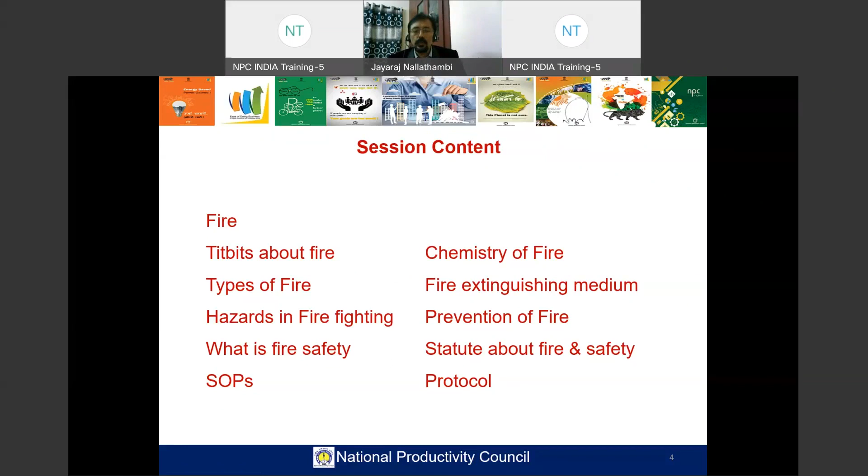activities involve some combustible actions. Combustion is the cause to produce fire. So fire is the visible effect of the process of combustion, a special type of chemical reaction.

What happened: until the year 1862, if the matchstick rubbed with any material, or stuck with another matchstick, it would catch fire. So it was very unsafe to handle. In a single box, we could have only one matchstick, or we had to provide a layer of coating over the matchstick to keep it in a single box. This was the history, because the composition of the matchstick was white phosphorus and potassium chlorate.

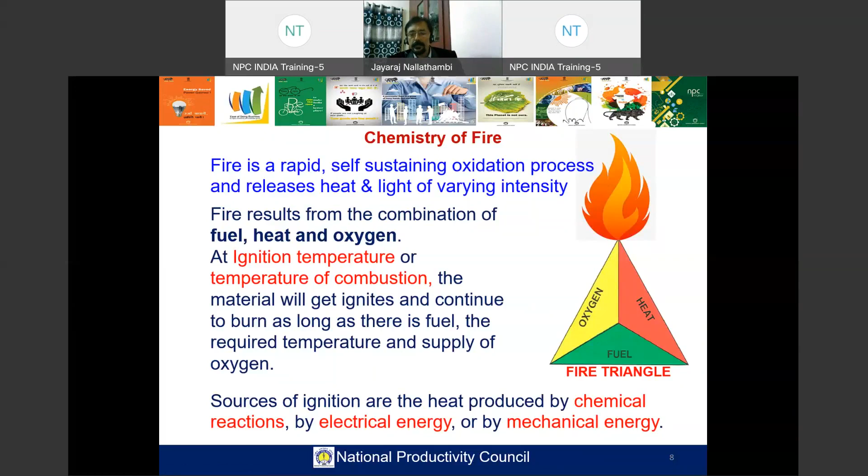Electrical energy by short circuit, or purposefully—deliberately creating heat energy by using electricity—is another source. Mechanical energy, mostly by friction, is another.

For a fire to be self-sustaining, the oxidation process itself should be self-sustaining. If the oxidation process does not continue, the fire will get put off.

The ignition that triggers the oxidation reaction between one tiny bundle of oxygen—say, one molecule of oxygen—and one tiny bundle of fuel must produce enough energy.

That is, the moment we ignite one tiny bundle of oxygen and fuel, giving it energy to start burning, it produces energy in turn.

That energy should be sufficient to ignite the next tiny bundle of fuel and oxygen, creating further burning. If this continues like this, it is considered a continuous chain reaction.

So in the fire triangle, in olden days we used to say there were only three legs—oxygen, fuel and heat. The later development added the chain reaction as a fourth element.

Unless the chain reaction sustains—unless the first particle of fuel burns to produce excess energy that induces fire in the next component of fuel—the fire will not continue. This is called a chain reaction.

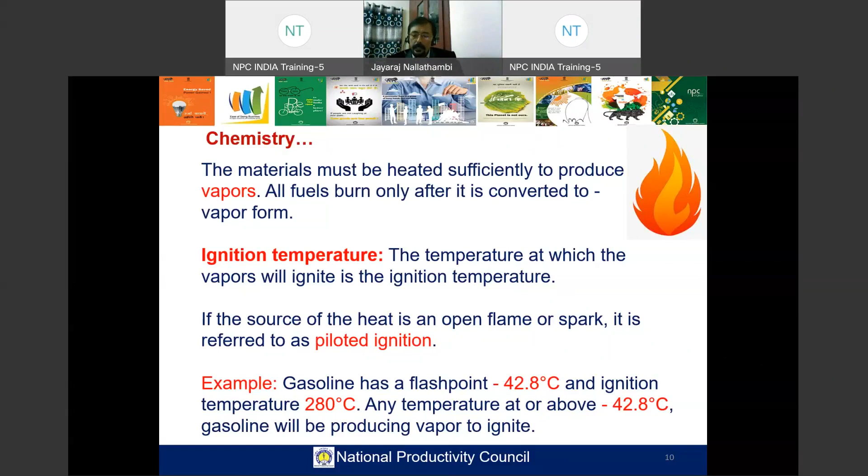What does that mean? From minus 42.8 degrees up to the ignition temperature, the gasoline is capable of producing sufficient vapor and catching fire if there is some source of piloted ignition given to it.

In the chemistry, normally carbon combines with oxygen in an oxidation reaction to give carbon dioxide. During this process, it releases a lot of heat energy.

Suppose oxygen is supplied in a limited quantity—then carbon is converted into carbon monoxide, CO, which can consume one more element of oxygen, meaning carbon monoxide itself can be used as a fuel. Carbon dioxide, however, is completely burnt and cannot be used further as fuel.

In fact, carbon dioxide is an extinguishing medium for fire. Similarly, hydrogen burns by combining with oxygen, liberating a lot of heat energy to form water. This is the main chemical reaction taking place during any kind of fire.

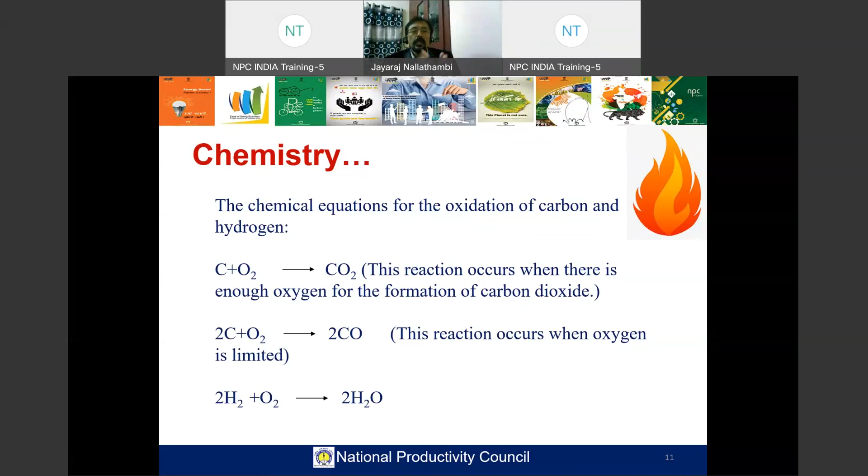What is heat? Heat is defined as the exchange of energy between system and surrounding. From one system, heat is transferred to the surrounding, and the direction of transfer of heat is from higher temperature to lower temperature. That will be the direction.

Flash point is the lowest temperature at which its vapors ignite. If no ignition source is given at flash point, it will not catch fire automatically. But suppose we give an ignition source, a spark or a flame, it will catch fire.

Fire point is the lowest temperature at which the vapors keep burning even after you remove the ignition source. It will continue to burn. That means it is able to generate sufficient energy to induce the ignition of the next element, every element in the sequential or chain reaction.

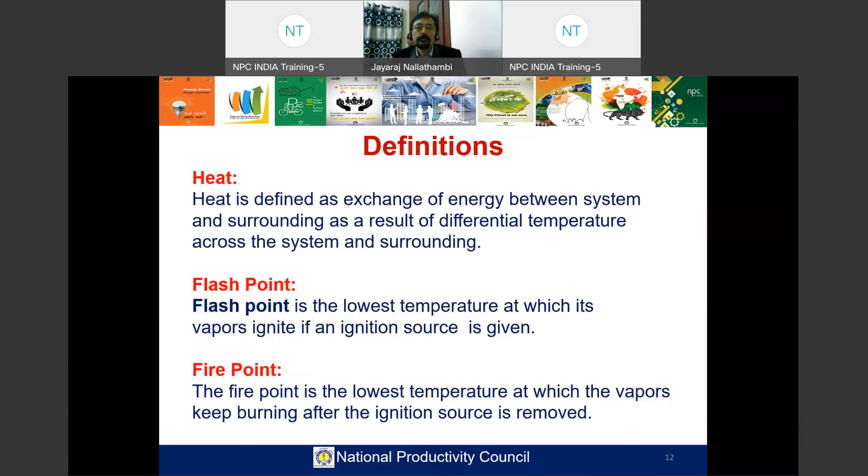What is pyrophoric iron? Industrial employees might be aware of this. Pyrophoric means any metal particle, if it is finely divided or crushed or sliced in a fine manner, and you allow it to oxidize, when oxidizing takes place, it becomes pyrophoric. Pyro means heat or fire. So when it comes in contact with atmospheric air, automatically it catches fire. That is, its auto ignition temperature is our atmospheric temperature.

For example, iron gets rusted in a sulfide environment, forming iron sulfide, and if it is finely divided, this iron sulfide forms over the iron structure. When this comes in contact with air, it catches fire automatically. That is pyrophoric iron. Other examples are plutonium and uranium, which also have the same property.

Combustion, what is combustion? Combustion is an exothermic reaction. Whichever reaction liberates heat is an exothermic reaction. It is self-sustaining, involving solid, liquid and gaseous fuel. Usually this is associated with the oxidation of fuel by atmospheric oxygen with the emission of heat, light, or both.

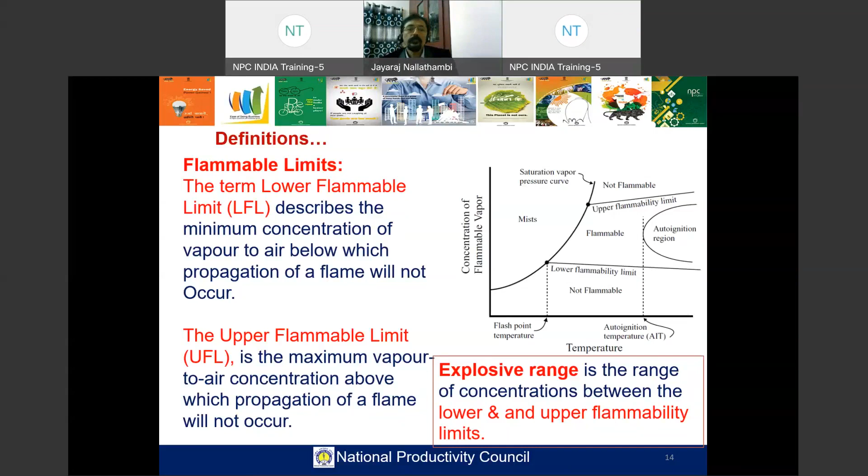Major causes of fire in industries. In most industries, we use fire for the purpose of energy, to initiate a reaction, to melt some metal, or to do some heat process for metal. For many things we use heat energy. So that's why we have to use it very safely.

Combustible material storage area with insufficient protection. Suppose we store a lot of combustible oil, gas, or explosive mixtures with insufficient protection, not properly covered, or kept very close to a hot surface. If this happens, it will be a cause of fire.

Handling open flames very near combustible material, like a candle or any other open flame. Flammable liquid and aerosols, meaning a fine mist of flammable liquid. If we spray some body spray or sanitizer, which we use very frequently nowadays, it is also a flammable component. If you press it, it comes out as aerosol, in fine particles, and if it comes in contact with fire, it will definitely catch fire.

Flammable liquids and aerosols, flammable solvents stored without protection. Chimneys, meaning the exhaust pipe of furnaces, if not cleaned properly, a lot of soot will accumulate inside and catch fire at some point.

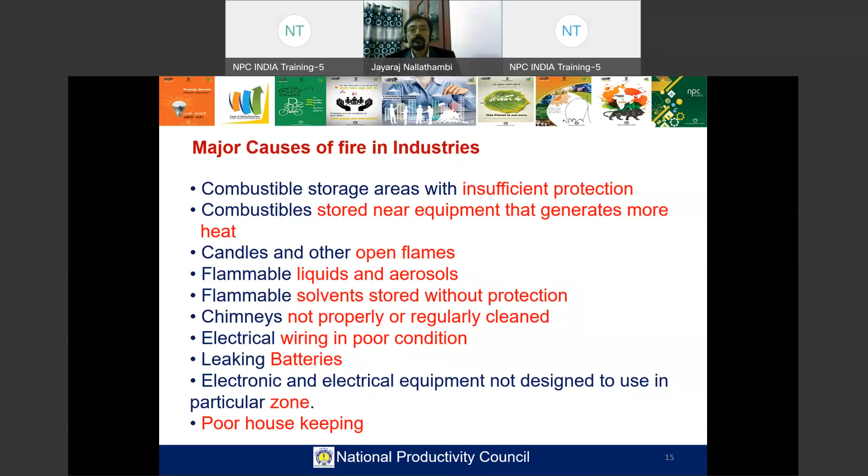Now we'll see the type of fire. Our Constitution of India provides detailed provisions for the rights of citizens to safety and health at the workplace, and provides measures to ensure safe and healthy working conditions for every workman and woman in the nation. As per BIS standard,

IS 2190/2010 classifies fire as follows. You would have seen in fire extinguishers, a lot of alphabets displayed like A, B, C. So we will see the types of fire.

So A fire, it's a shortcut method I'm telling you: after burning, whatever component is in the fire produces some ash. A for ash, just keep that in mind. Like wood, paper, waste material, all these are A type fire, which can produce ash after burning, reduced to ashes. Cooling effort is more than sufficient to put out the fire, so mostly we use water.

Class B fires involve flammable liquids or liquefiable solids, where a blanketing effect is essential. This B fire is like a boiling liquid fire.

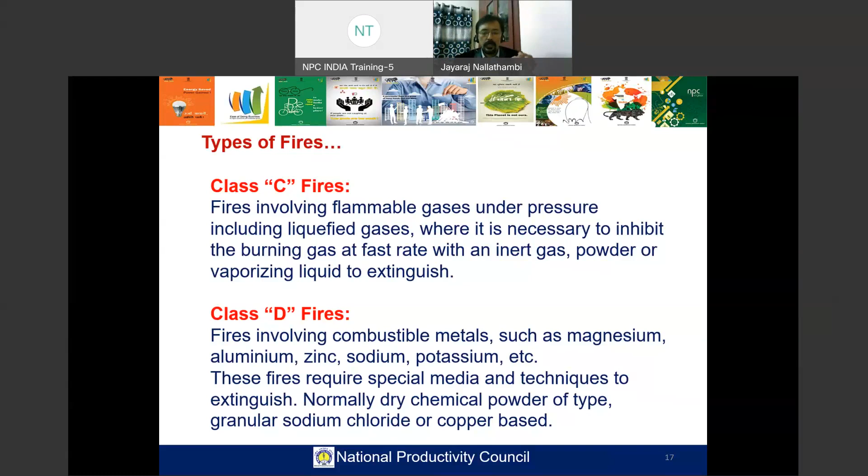Next one is class E. This E is not clearly classified anywhere. We call it electrical fire, but when you consider an electrical fire, the moment you switch off or trip the electrical supply to the system, it automatically changes from electrical fire to the fire of the material involved. Suppose it's wood, then type A fire. If it's gas, then type C fire. So as long as you don't disconnect or de-energize the system from electricity, it is considered an electrical fire. Normally people don't use this class E as electrical fire, it's a general term only.

For electrical fire, we use carbon dioxide, an inert gas, as the extinguishing medium.

The latest addition is class F fire. There's cooking fat and oil. It happens in kitchens, not only domestic, but in bigger level kitchens in industries, hotel industries and so on. Deep frying pans and all these handle very hot oils. It can catch fire if the oil reaches its auto ignition temperature, and at that moment it will catch fire.

The picture on the right side was deliberately taken in a laboratory, where oil was kept in a pan and heated to allow it to reach its auto ignition temperature. The moment the auto ignition temperature is reached, the oil catches fire. After the oil catches fire, deliberately from a safer distance, water was poured in. The moment water was poured in, it splashed over the oil to the outer atmosphere and the flame expands like this, so the entire area is in flame. It's a laboratory test method photo for this.

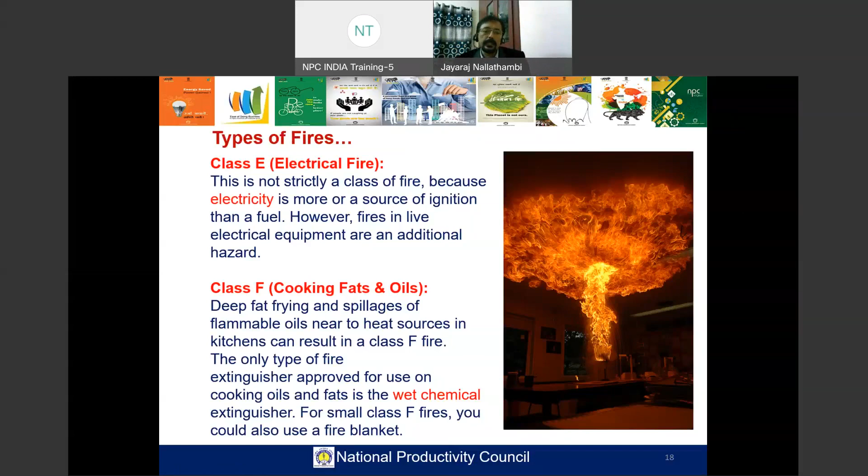So this table describes the type of fires and what kind of extinguishing medium we use. You can refer to this - whatever we discussed so far is displayed here.

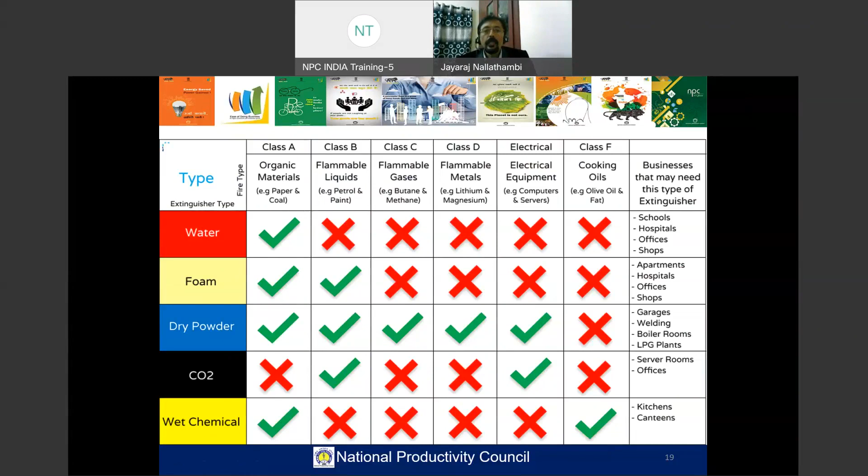Now we'll go to fire extinguishers. A fire extinguisher is used to extinguish fire as long as the fire is under control. If it goes beyond control, the fire extinguisher is not going to help. We can say it's a first aid firefighting equipment - as long as the fire is under control, you can use the fire extinguisher.

Very importantly, the persons available in the premises where there is fire should have been trained on how to use a fire extinguisher. That is very important in the event of fire. If they don't get proper training, they will simply waste the fire extinguisher and it will not be properly used. If employees have not been trained properly, firefighting may get delayed, extinguisher material may go unused or wasted, leading to consuming more extinguishers.

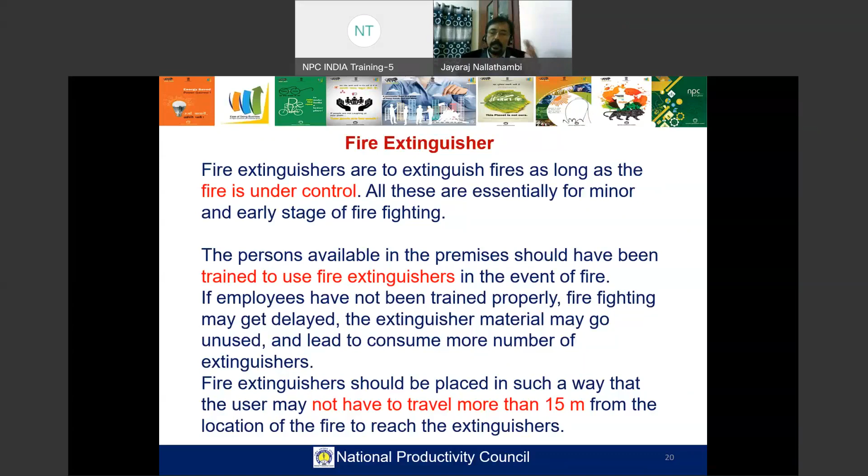Fire extinguishers should be placed in such a way that the moment you see the fire, from the spot of the fire you should not need to walk or run over 15 meters. That means every 15 meters, or taking the middle point with 15 meters on both sides, fire extinguishers should be placed at such a gap. The person should not run here and there to find a fire extinguisher more than 15 meters away - that is a safer practice for industry as well as for big buildings.

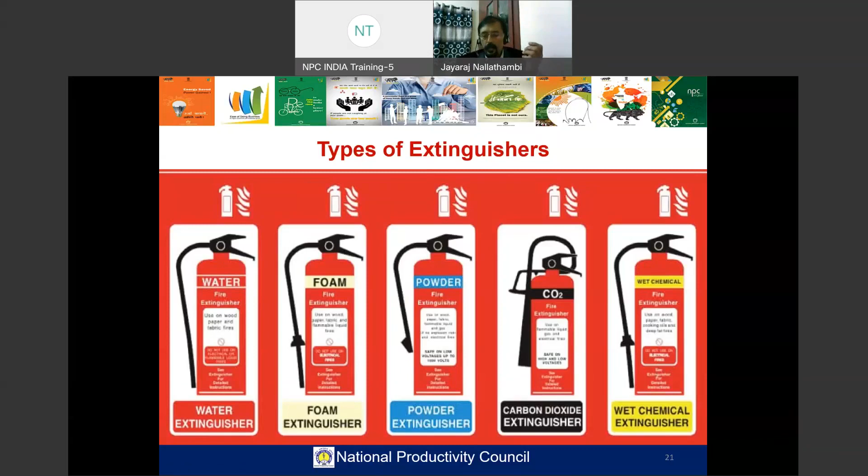These are the types of extinguishers - we will see detail about them in later slides. One is water, where compressed air is filled along with water, kept under air pressure. Foam - we will see what that is. Powder - there are a lot of powders, dry chemical powder as a general name. CO2 is carbon dioxide, and wet chemical is for type F fire, that is kitchen fire. So these are the different types of extinguishers - please note the points about them.

Availability at the designated place. It should be checked whether the extinguisher is available at the place marked for it. Suppose somebody has taken it and kept it somewhere else, then when the real need comes, we have to search for it and waste time.

No obstruction to access or visibility. There should not be any obstruction to reach the fire extinguisher. Operating instructions should be legible and facing outward.

Safety seals should be intact. If it is removed, then the pressure may not be there inside, and it will not help in the emergency.

Whether it is full should be checked. Fullness is determined by weighing or lifting. Just by carrying it, you can feel the weight of the extinguisher.

Examine for physical damage like corrosion, leaks, or clogging, or damage in the hose, something that you can see as physical damage. If a pressure gauge is available, whether it is showing the required pressure range should also be checked.

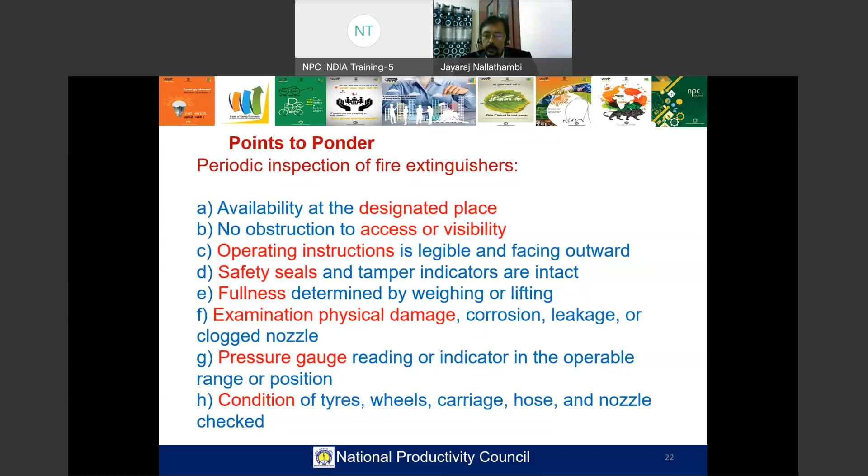Condition of tires, wheels, carriage, hose, and nozzle should be checked. Where wheels and tires are involved, very big size extinguishers are kept on a trolley, like a truck kind of thing, so the wheel should be proper. Then only we can push it to the required place at the time of emergency.

This is the high volume long range monitor, abbreviation HVLR. Using this HVLR, we can throw water for a long distance of more than 85 meters, and the capacity is 2000 gallons to 4000 gallons per minute. Please note, 2000 to 4000 gallons. We all know 1 gallon is approximately equal to 3.75 liters. So you just multiply and see the capacity or quantity of water we can throw at the fire accident place using this high volume long range monitor, or HVLR.

This is both manually operated as well as motorized, using a remote also. We need not go to the spot. Standing safely away from the fire scene, we can operate it. That is, we can turn the direction up, down, and swivel sideways, and adjust the flow pattern also, like spray or jet or nozzle.

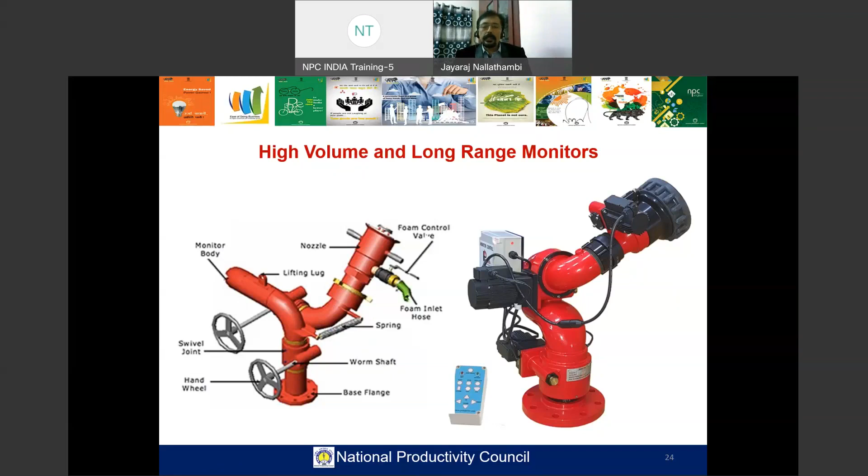This is the left one, the manual one, we can operate this for the same capacity. How it is effective and useful at the time of very high intense fire, you can see in the later slide. Before that, these are certain photographs of fire water sprinklers.

The purpose of the fire water sprinkler is for the most dangerous or vaporized, evaporative, high volatile material stored vessels. Suppose due to any reason gas leaks or a fire occurs nearby, due to that heat intensity, the stored vessel should not get heated up. If such a situation arises, automatically these sprinklers will start to spray water on the entire outer surface area of the vessel, so that the vessel is kept under cooled condition.

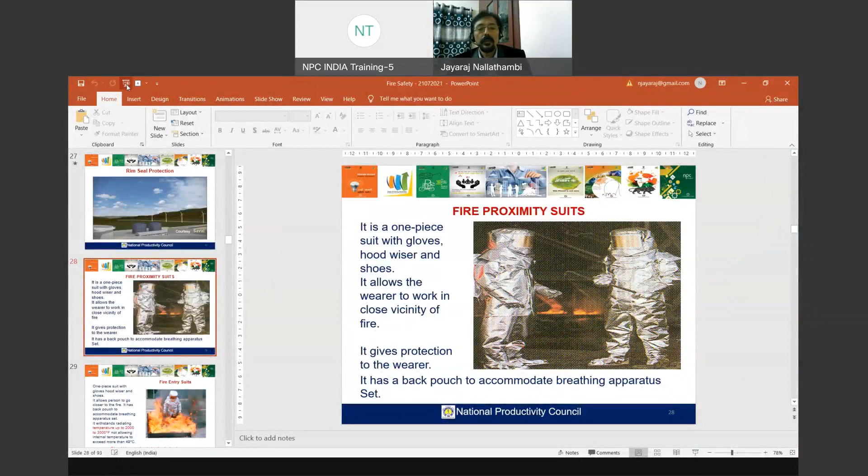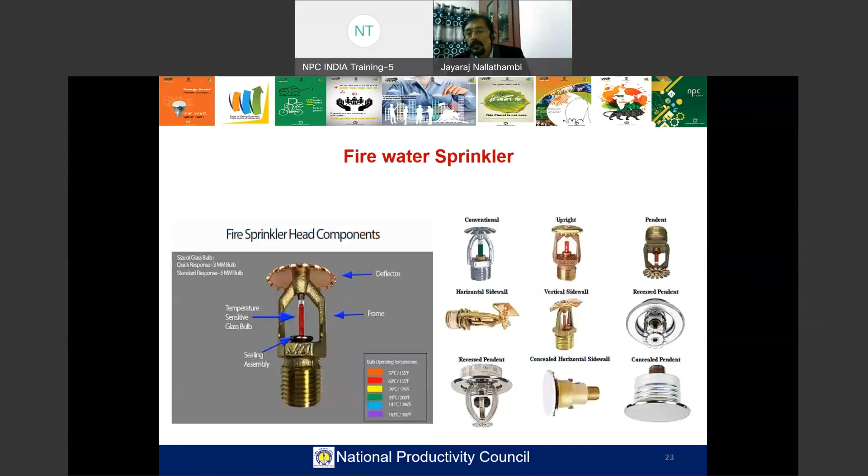In that slide, we saw that when vapor gets accumulated, possibilities are there that if lightning strikes or any inadvertent accident takes place, this system will automatically sense it. As discussed with the sprinkler, one bulb gets broken the moment the temperature of the environment rises, and it initiates water spray. Similarly here, a temperature sensitive bulb gets broken, and it sprays the pressurized vessel which contains halon gases to put out the fire.

It's a latest development. The other thing is fire proximity suits. To fight a fire, we can reach very close proximity to it, not into the fire. Please understand, it is a proximity suit only, not a fire suit. Fire suit is different and also available. This suit is a one-piece suit with gloves, hood, visor, and shoes. It allows the wearer to work in close vicinity of fire and gives protection to the wearer.

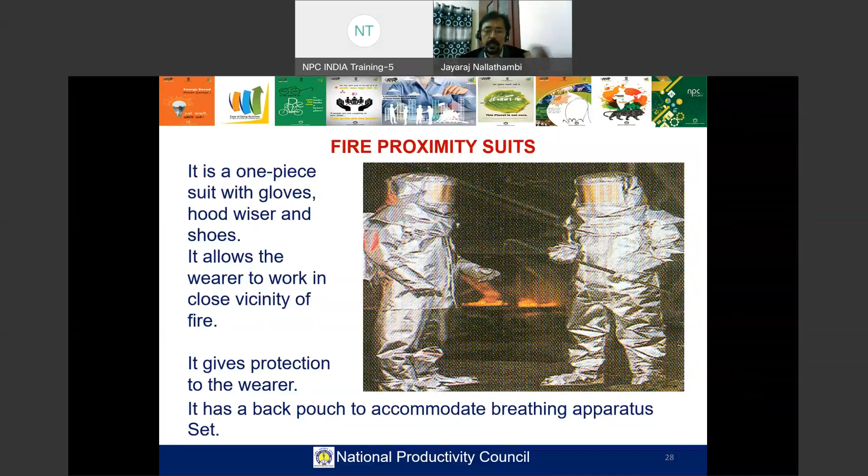It has a back pouch to accommodate breathing apparatus. You all must be knowing from industry that breathing apparatus contains pressurized air which supplies controlled breathing. This is a fire entry suit.

The difference between fire proximity and fire entry suit is that the fire entry suit is made up of mostly asbestos material which can withstand temperatures up to 2000 to 3000 degrees Fahrenheit, not centigrade. The facilities available are both the same; only the withstanding temperature capacity is very high. It should be used only by trained persons, because once you fit the suit, it's not easy to walk, move, view, or communicate with people behind you. It is not easy unless you are trained properly. It will look like a man going to space.

We'll see the firefighting medium. The most common, cheapest, and abundantly available firefighting medium, what is that? It is nothing but water. Why is water so easy to put out fire?

For putting out fire, what we are going to do is remove one of the handles of the fire triangle: heat, air, or fuel. Here you remove the heat, that means you are going to cool, you are reducing the temperature. That means you are going to use some material which is capable of removing the heat.

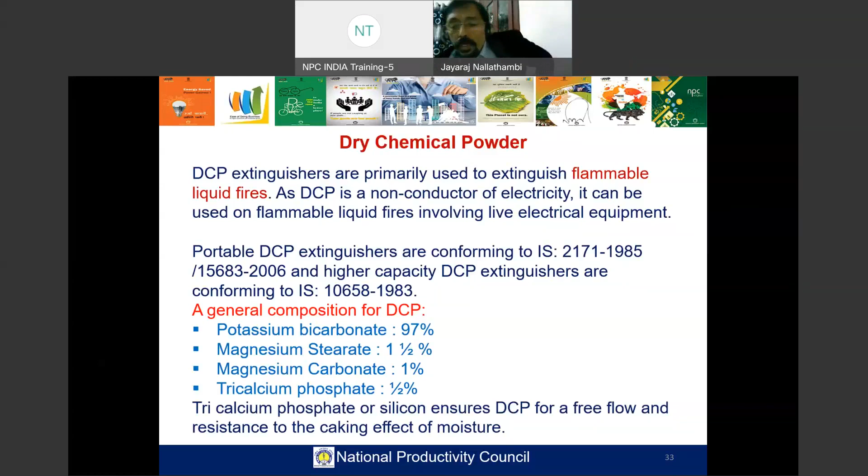1985/15683-2006, and higher capacity DCP extinguishers as per standard number 10658-1983. What is the DCP composition? DCP means dry chemical powder: potassium bicarbonate, magnesium stearate, magnesium carbonate, tricalcium phosphate. Tricalcium phosphate or silicon ensures this is very important. So all this powder we put together in a vessel cylinder, and if we keep it for a long time and it becomes a bulk or a lump, what will happen at the time of requirement? It will not flow out. To ensure the flow, silicon component is mixed with it so that it will not form a cake.

Carbon dioxide is another extinguishing medium, that is CO2. It's an inert, non-corrosive, non-conductor of electricity, used for fire involving energized electrical equipment.

Very important thing: when you use the carbon dioxide extinguisher, as it comes out of the nozzle it creates a chilling effect because the carbon dioxide utilizes the heat available in the environment to get fully vaporized. So the nozzle or hose, the horn of the extinguisher, becomes very chill. A phenomenon called frostbite can occur, where our skin attaches to the cold surface.

Another point is because of this chilling effect, the outer surface will become wet. Once it becomes wet, because of dirt or impurities on the outer surface of the horn, it may start to conduct electricity. So even though carbon dioxide itself is a non-conductor, this wetness created by the chilling effect may conduct electricity. Care should be taken before using the CO2 extinguisher.

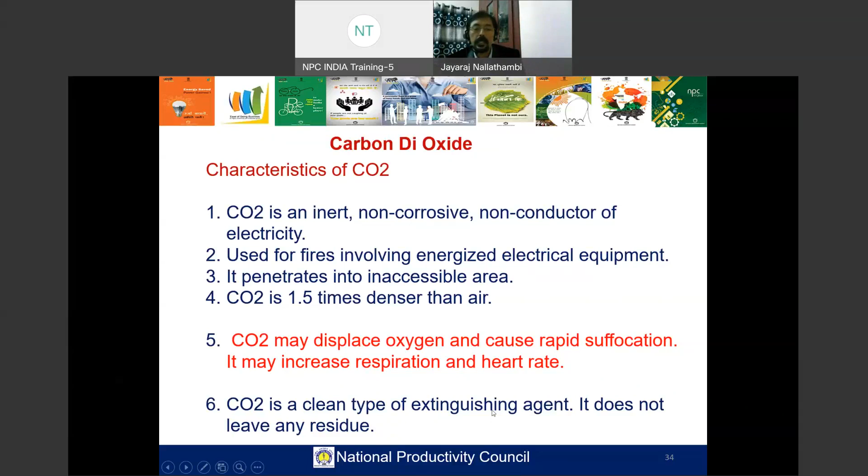Mostly in industry, steam will be available. If you use a lot of steam, you can give a blanketing effect for air, so it is considered as removal of oxygen from the fire source. That is how it is used.

Sand can be used to prevent the spreading of burning liquids. Sand should not be used for extinguishing fires in rotating machines, that is very important.

Fire blanket: suppose a person near a fire accident has his dress material catch fire, this fire blanket, filled with a kind of jelly, can be covered over him to give a cooling effect, and he should roll on the floor to put out the fire and get saved.

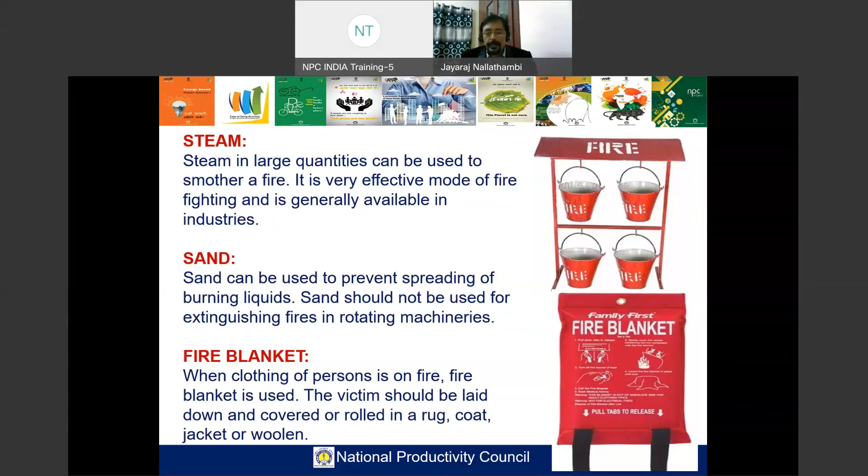This wet chemical we already discussed about the kitchen fire. In this, what happens is it gives a cooling effect, and potassium salts are used for the process of saponification, forming a soap material that is non-combustible. Because of that, we are able to extinguish the fire in the kitchen.

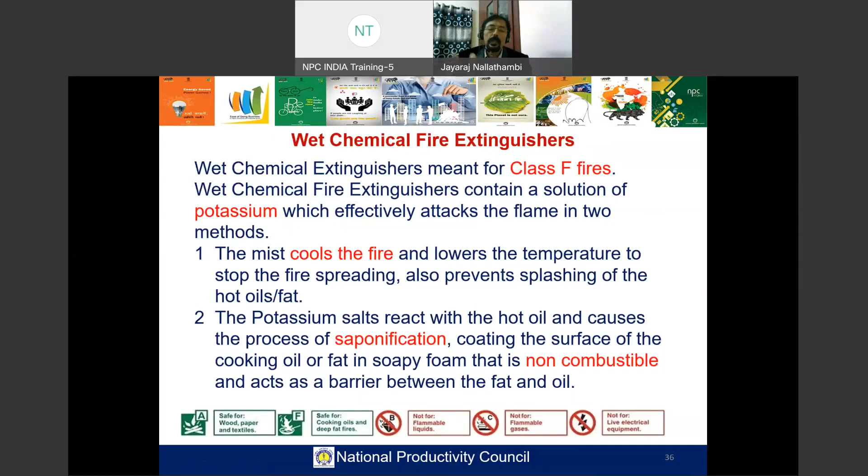Jayaraj, yeah sir, please adjust your mic. Earlier your volume was at a higher side, now it is coming at a lower pitch. Please adjust your mic. Okay, it is okay now. Okay, okay.

Two or three phenomena about fire we will see: boil over, slop over, and BLEVE. This is a very important phenomenon for industries which handle liquid flammable material.

Suppose a liquid material is stored in a tank with a roof, but in due course of time, due to corrosion, a hole forms on the roof. At some point during the rainy season, water may go into the tank. Suppose the material is not water sensitive, the water settles at the bottom and stays quiet without harming the product. But at the time of emergency, at the time of fire, what happens?

When these tanks are on fire, the heat transfer occurs with the flame on top of the layer of oil or flammable liquid. The heat transfers from the layer to the bottom of the tank as well as above it. At the bottom, it keeps on quiescent burning, that is, it burns calmly and continuously. So in this quiescent burning, when the heat transfers downward and reaches the bottom, the water available there starts to boil.

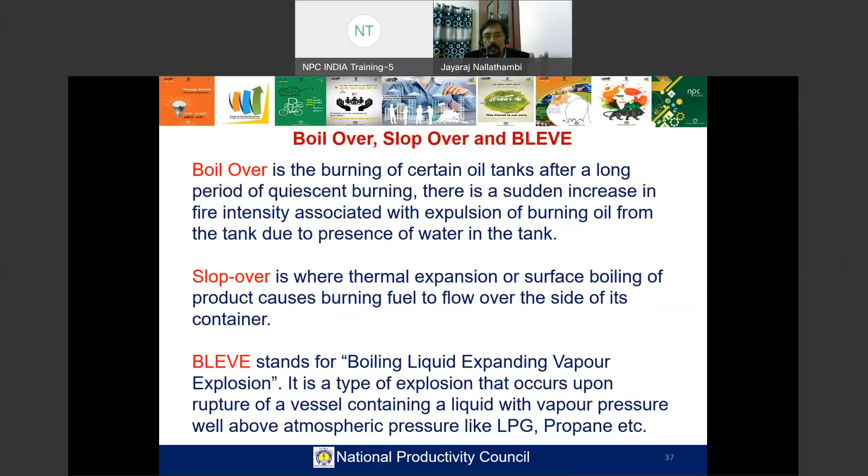Slowly it will get heated. At one point, the heat transfers to the tank shell, the metal outer shell, and this outer shell transfers heat to the liquid inside, so the LPG available inside the tank will start to boil and expand. At one point, because of the external heating, the metallurgy of the tank will get disturbed and it will start to expand widely, leading to a very big disaster. That is BLEVE.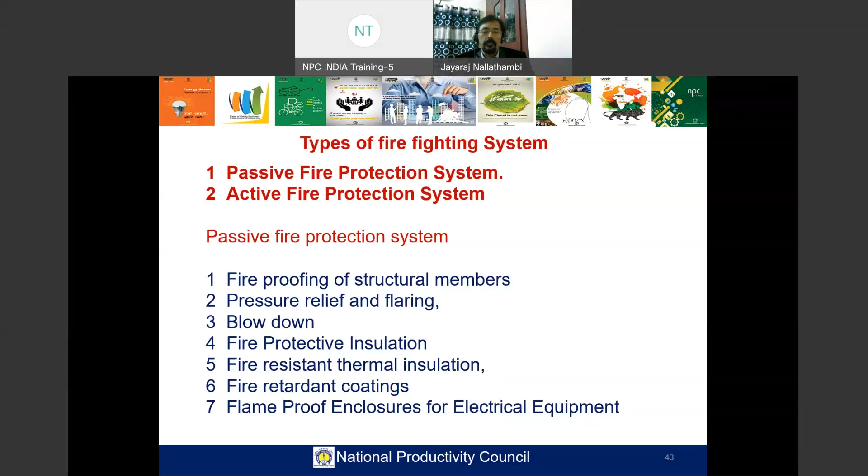What is passive fire protection system? These passive systems are inbuilt in the system itself. It will take care round the clock, 24/7, 365 days, the system will take care even in our absence.

Whereas in the active fire system - sir, please adjust your mic, actually your mic. Volume is high or low? Now the volume is okay.

Active fire protective system: fire extinguisher, fire water supply system, fixed or semi-fixed firefighting system, mobile truck - all these are active fire protection system, because we have to activate these things.

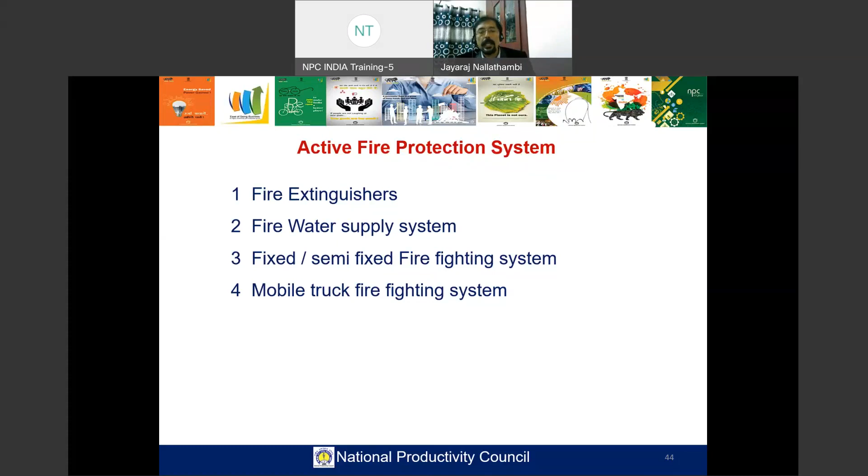So methods of fire extinguishing, already we discussed. Starvation means we make the fuel non-available to continue the fire, elimination of fuel. Smothering is controlling or stopping the supply of air, that is oxygen only. Cooling means removal of heat. Chemical interference means interrupting the chain reaction. All these four factors - chain reaction, heat, air and fuel - are important for sustaining a fire.

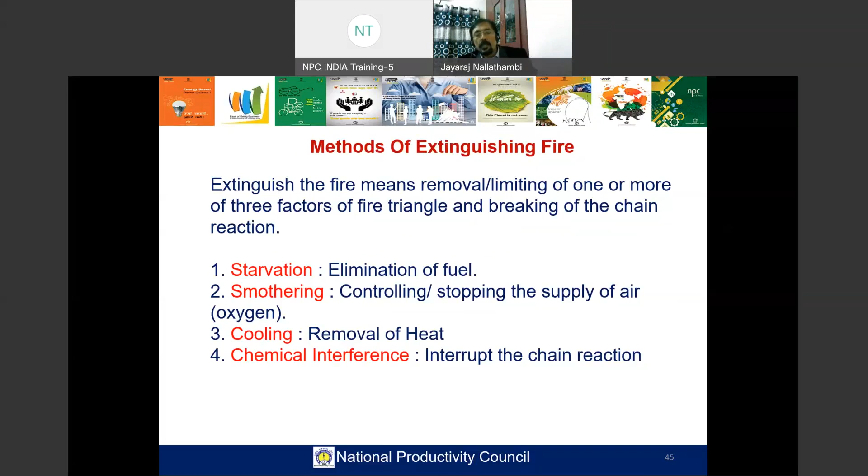Starvation is removal of combustible material, fuel from tanks, taking out of cargo at a ship. On ships, when a ship catches fire, the immediate aim should be to fight the fire. If it is beyond our control, then to the possible extent we should remove the cargo from the fire. Cutting off branches around forest fires, closing the valve on the gas fuel lines.

You would have heard that in forest firefighting, one method used when it is going beyond control - sometimes it continuously burns for days, weeks, months, years - is that if it is uncontrollable, they set fire to the same forest from the opposite side. From one end the fire is traveling, and from the other end, if you set a fire, you can confine the fire into a single area. It completely burns out, and due to starvation, there is non-availability of further fuel or wood. It will get put off.

That is one method. Suppose in a hutment area, if huts catch fire, they fight the fire. At the same time, since huts are normally very adjacent to each other, in between two or three huts, they will demolish and remove some, creating a gap, so the traveling of fire will be stopped. That is also one method of starvation only - by removing material on fire, for instance, pulling apart a burning haystack or a thatched roof, or by subdividing burning material into small sized isolated fires to break continuity.

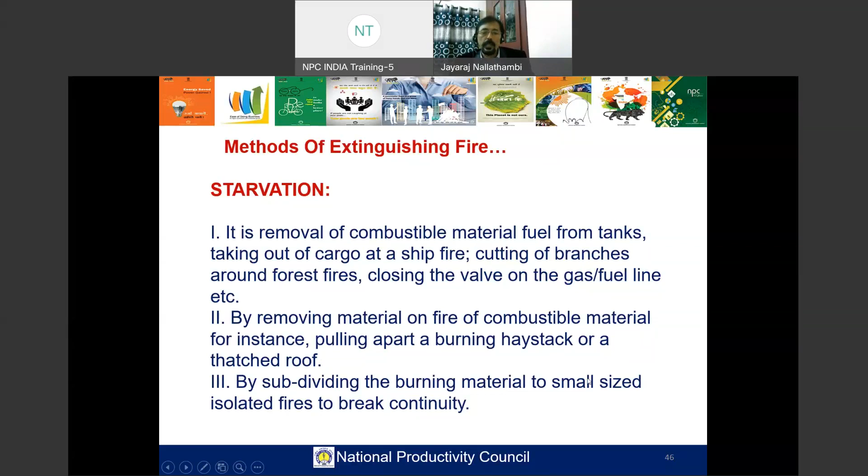Smothering is removal of oxygen or preventing oxygen, handled by using steam or carbon dioxide. Cooling is applying water only - that is, you remove the heat.

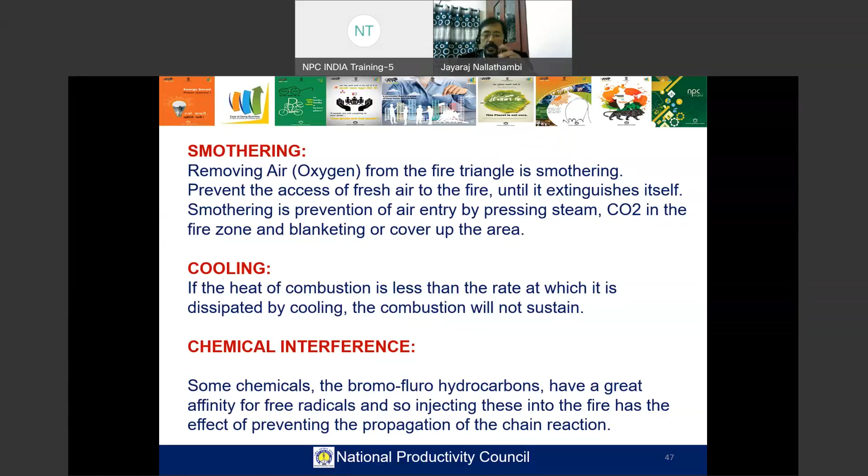Chemical interference: some chemicals, the bromofluorohydrocarbons, have a great affinity for free radicals. The free radicals are the main elements to continue the chain reaction. So to control these things, these bromofluorohydrocarbons will be used for intervening in the chemical reaction.

So how are we going to use an extinguisher? Keep the acronym PASS - P-A-S-S - in mind. P means in the extinguisher there will be a pin, a cotter pin, or a lock pin. That pin should be pulled out - this will break the seal. You should break the seal and pull out the pin.

Then, to fight the fire, you should aim at the seat of the fire or base of the fire, not at the top of the flame. From where it is burning, that seat or base of the fire should be aimed. Squeeze the handle on the extinguisher and sweep across the flame so that the entire area will get covered.

Aim at the base of the flame. Squeeze the lever so that the powder will be released. Sweep side to side so that the fire will be put off. This is the method to use a fire extinguisher that you must know.

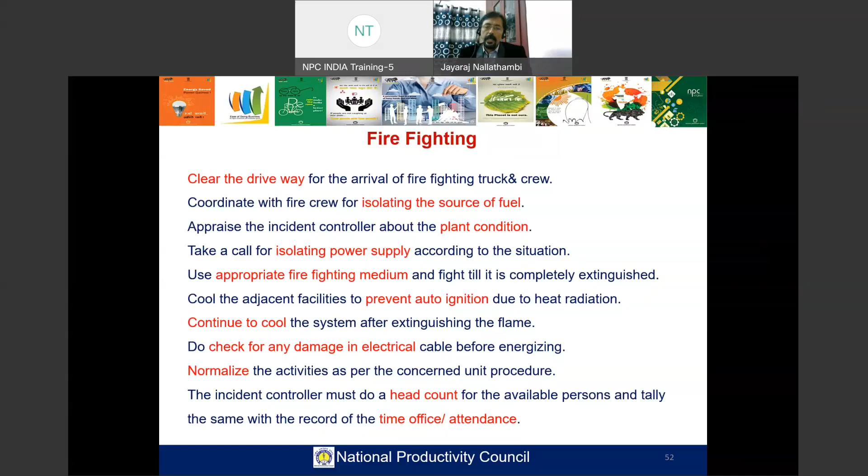So as routine check, keep the inventory list of firefighting equipment and check for its availability at their designated location. That is very important. Do periodic check for every equipment and update the checked date on the extinguishers.

Familiarize with the different types of alarms. Mark emergency exit route. That is very important. Also note extinguisher location, fire water hoses location, and communication system.

Do mock drill to ascertain the preparedness of the team to handle emergency. This mock drill, once in a while or on a fixed periodicity or frequency, should be conducted with the coordination of the entire employees of the industry.

And suppose if it is considered to be an off-site mock drill, that is the emergency spillover outside the campus of the industry, you should get permission with the revenue department authorities, and that mock drill also you should do.

But keep it in mind, never attempt to create a real emergency to conduct the mock drill. Suppose you are assuming a situation that your process unit is on fire, but don't set the unit on fire. Recently you would have read a news item during COVID-19 cases. In one hospital it happened, a serious thing happened. So that's why I specifically mentioned this point here.

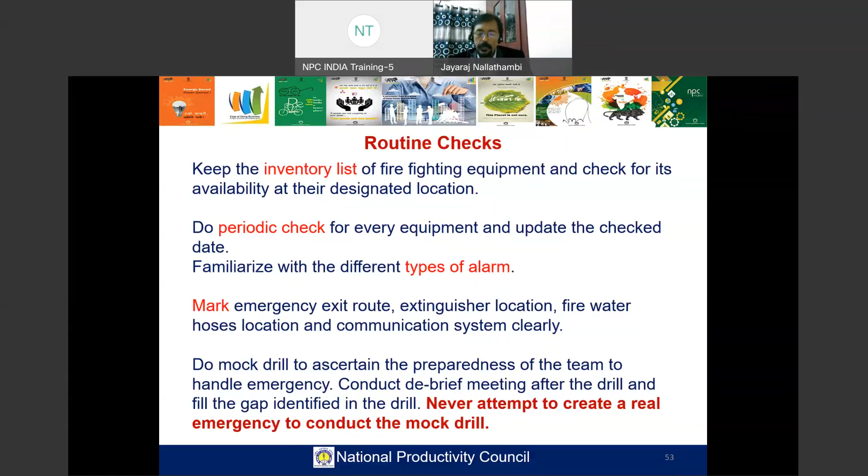If on fire, the best thing is stop, drop, and roll, because normally flame travels upward. So you drop down and roll. Smother the flames with a blanket if it is available. Move away from the heat source.

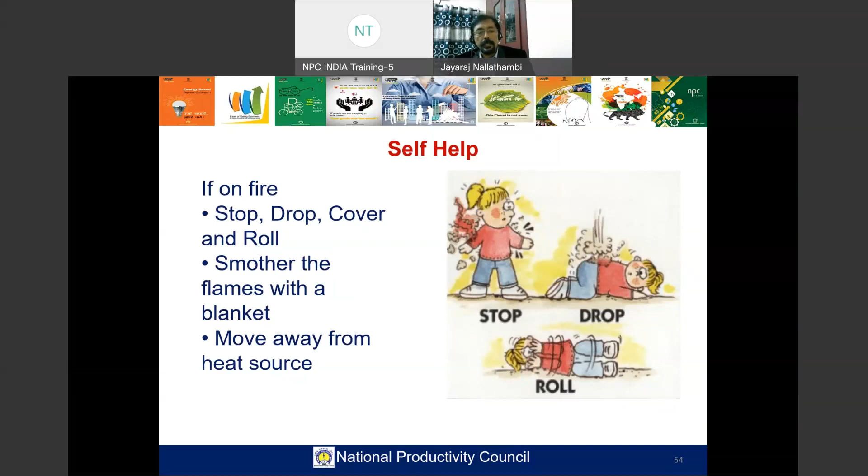That is for personal safety. Now we'll move on to safety. This is all about fire chemistry, type of fires, type of fire extinguisher, extinguishing medium, the methods we use, intensity of flames — all these things we have discussed so far.

Now we will discuss about safety. We'll go a little faster because time is nearing our target time. And if you have any doubts or questions, you can discuss them at the last session, end of the session.

Fire and safety are the integral part of each other and inseparable. I think that's why the class is also designed as a fire and safety class. Unless safety consciousness is in mind, we cannot prevent a fire or fight a fire. The fire crew works to ensure safety of men, material, and contain the impacts due to a fire accident.

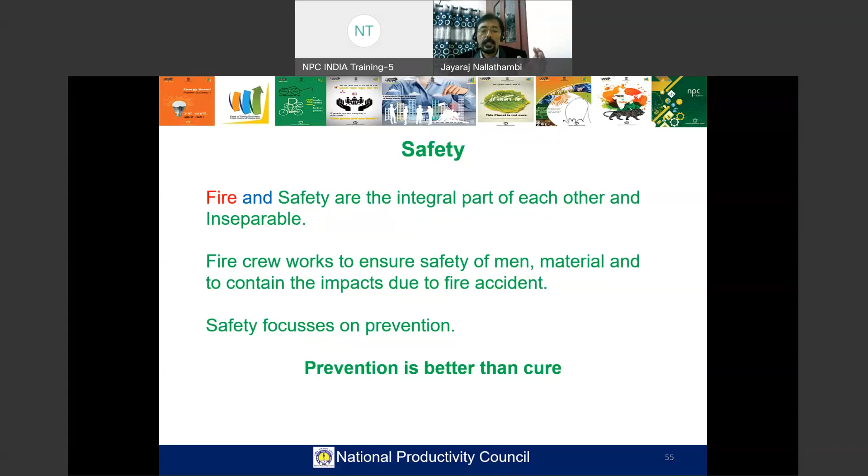Safety focuses on prevention. Please keep it in mind. Prevention is better than cure.

The objective of fire safety is to prevent a fire incident. In the event of its occurrence, the aim is to reduce the destruction caused by fire. Fighting the fire at its incipient stage is always easy, that is, at the early stage it is always easy.

The moment we notice the fire, we should attack. If we wait for something, it will spread, and then we have to wait for it to get extinguished automatically.

You may remember that one incident happened at Jaipur in an oil terminal. The fire was put off after completely burning out all the available fuel only. We couldn't do anything about that. So such a thing will happen. If we notice it and start to act at the early stage, we can prevent it.

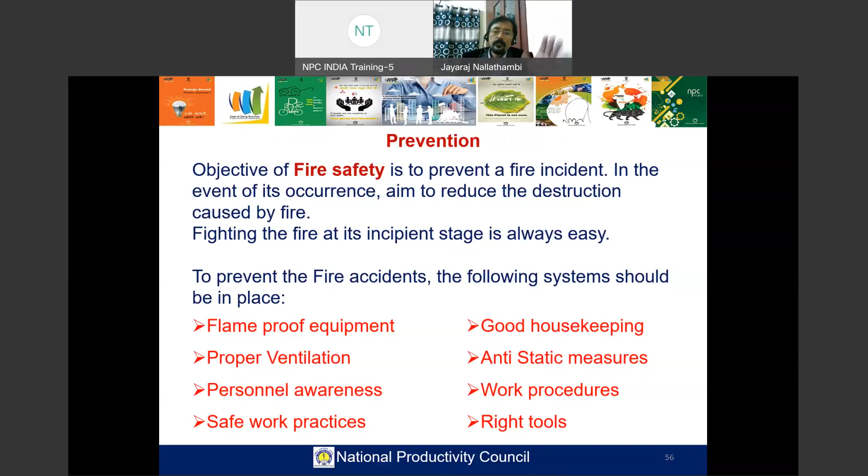To prevent fire accidents, the following system should be in place: flame-proof equipment, proper ventilation, personnel awareness, safe work practices, good housekeeping, anti-static measures, work procedures, right tools — all these we now follow in day-to-day activities.

Fire exit route should be there, very clear, and at any cost don't use that space for storing material in that area, wanted or unwanted, because the fire exit is rarely used except at the time of emergency. But if it can't be used at the time of emergency, we may not be able to save people.

Exit route is a continuous, unobstructed path of exit travel from any point within your workplace to a place of safety. That means if you enter an exit door, even if there is no light, if you keep moving along the pathway, you should reach a safety point.

The exit route must be located as far away as practical from each other. Here, normally two exit routes should be there.

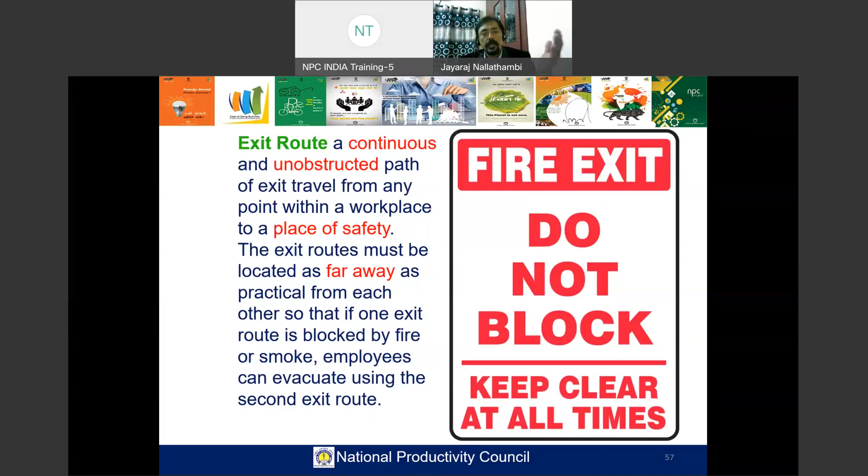Both should be placed far away, because suppose a fire takes place near the exit route, the entire area will be under flame or smoke, so the next adjacent door also we cannot use. So if we keep the other one far away, using that we can escape.

Exit route must be permanent. An exit must be separated by fire resistant materials. The number of exit routes must be adequate. Exit discharge must lead directly outside. Exit door must be unlocked from inside. This is very, very important. Exit door should be kept in unlocked condition, not only inside, both sides.

Recently, a week or 10 days back, you would have observed a news item. There was a fire in Bangladesh in an industry where people were kept locked inside. No one was capable of coming out because all doors were locked and they were working inside. Most of them got charred.

A side hinged exit door must be used. Exit route ceiling 7 feet 6 inches height and 28-inch wide. Lighting and marking of exit must be clearly visible. These are the basic things.

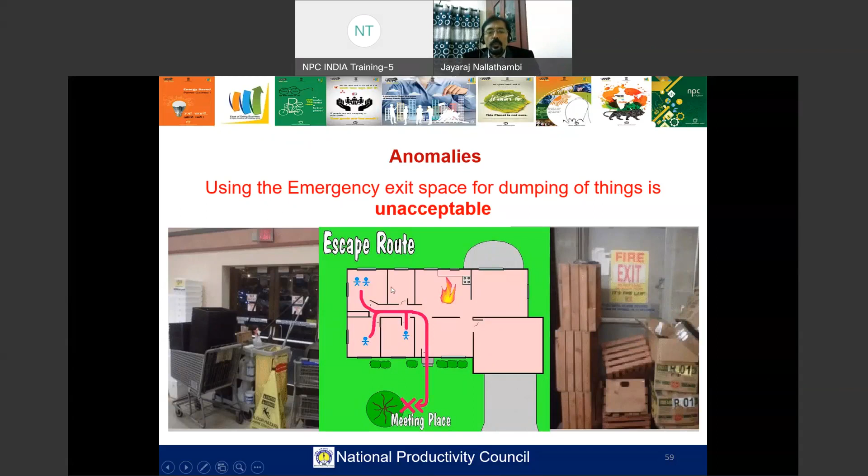See the exit routes. This is fire exit. Follow my cursor, how the area is used. This is not a created photo, it's an actual photograph taken during an audit. Like this, things happen normally everywhere, but we should be very cautious to keep this area very clean and free from any obstruction. Escape route should lead you to an assembly point or meeting point.

What are the things you should do? That also you should know. Fire order should be implemented in the premises with the roles and responsibility of all occupants. Any fire order, the persons employed or in service should have a defined role. What are the roles they are going to do at the time of emergency? Everyone should be clear on it.

Good housekeeping: all receptacles for waste should be emptied regularly. That is, waste bin or dustbin should be in empty condition, otherwise it would be used as additional fuel for the fire.

Correct rated wire and electrical appliance should be used. Faulty electrical appliances should be repaired or replaced immediately. Hot jobs means any job which can create a spark - welding, grinding, rubbing - we can create spark or heat, so it should be carried out under strict supervision.

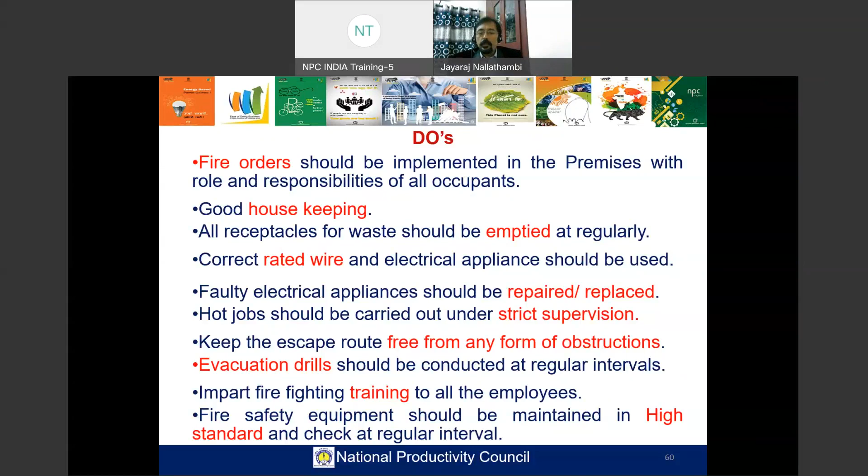Keep the escape route free from any form of obstruction, that we already discussed in detail. Evacuation drill should be conducted at regular intervals. Impart firefighting training to all employees - all the employees should be trained. Fire safety equipment should be maintained to a high standard and checked at regular intervals.

Don't plug too many electrical appliances in one socket if it is an office - normally it happens, but in the plant area it doesn't happen, mostly. Don't store LPG gas cylinders more than the permitted numbers. Don't apply any paint on fire detectors, sprinklers, etc., because all are sensitive items - if you apply paint over that, it will not sense. Don't engage inexperienced contractors for servicing of firefighting equipment.

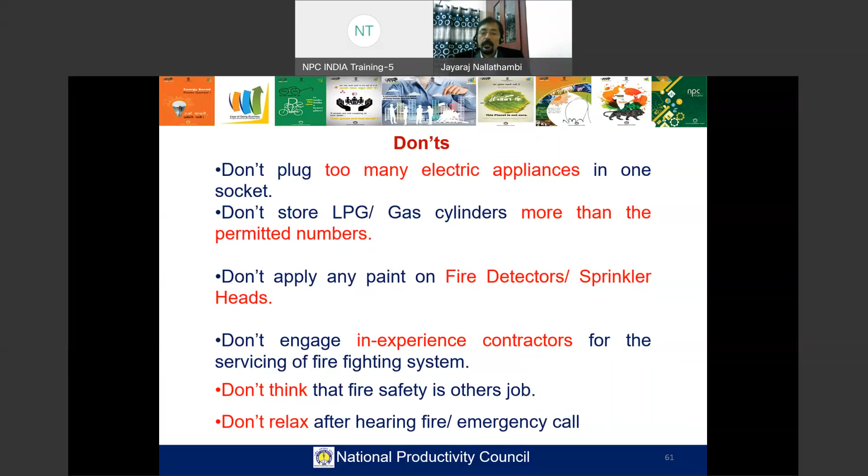That is very important - don't think that fire safety is someone else's job. One can never think like this, because occasion may come when we may be in the flame. Don't relax after hearing fire or emergency call. Once you hear the emergency call, you should act very quickly, swiftly.

On electrical safety, only trained maintenance employees are authorized to carry out troubleshooting. Don't attempt to do any maintenance activities if you are not trained for that. Always permit only authorized persons to do the work. Never use damaged electrical equipment - it's a very common problem.

If the electrical socket gets damaged, then what do we do? Normally we insert the wire directly into the plug point and put some wooden sticks into that to prevent it from falling. It's a very dangerous practice, because in industry the load will be very high, and the higher the load, the higher the current will be.

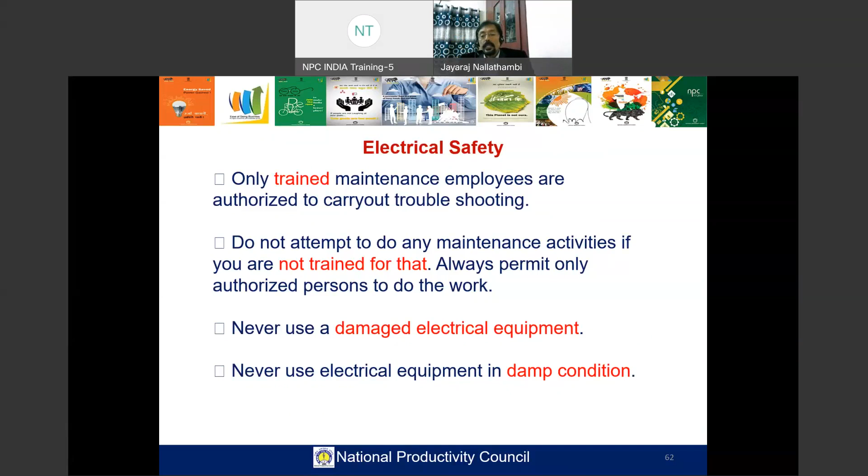Never use electrical equipment in damp or wet condition. For electrical safety, the lockout tagout system should be followed very strictly. Lockout tagout means...

Before doing or starting any electrical work, de-energize it and provide a lock over the electrical energizing-de-energizing breaker. How many locks should one put? A person who is owning that equipment - suppose a person from operation or process department, he is operating the equipment, meaning he is the owner of the equipment, he should put a lock.

And the person who is going to do maintenance work, suppose if it's a pump mechanic who may come and attend, he will also put a lock. And the electrical person who is de-energizing the breaker, he should also put a lock and take the key with him. So all three keys make up the lockout.

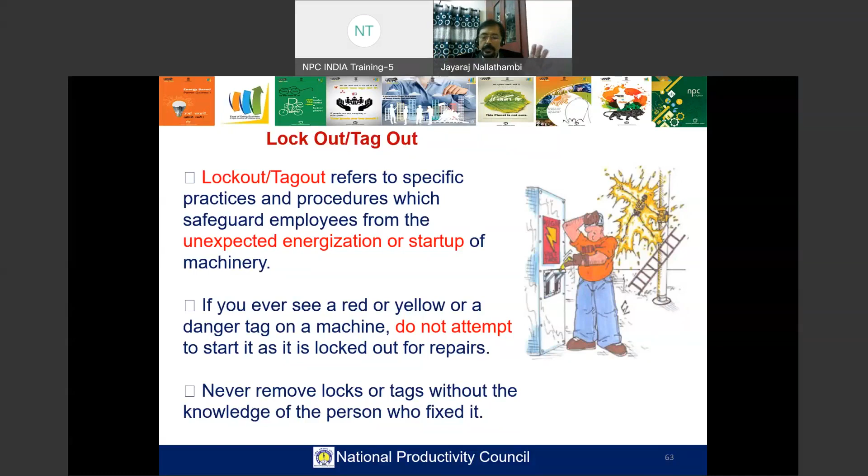Tag out means the person who does the maintenance work, like a rotary or pump mechanic, should ensure the job is completed, then remove his lock and go away. The owner of the equipment will open and take the lock. Finally, the electrical person who is going to energize the system will remove the lock and then energize it. For all these things, records and a signing system should be there. This is the lockout tagout system. If the system is followed, there is absolutely no chance for accidental energizing of the system and somebody getting electrocuted. Such a situation will not come.

When you open the breaker, there can be flashover, metal melting due to vapor, because contacts reach a very high temperature. The moment you open it, flame comes out, which may spill over your face, or charred or molten metal may spray. The temperature can go up to 20,000 degrees centigrade. Prevention includes de-energizing electrical equipment, wearing suitable PPE, keeping a safe distance, reducing the energy output from an incident, carrying out a risk assessment, and training on-site workers to control risk and interrupt faults.

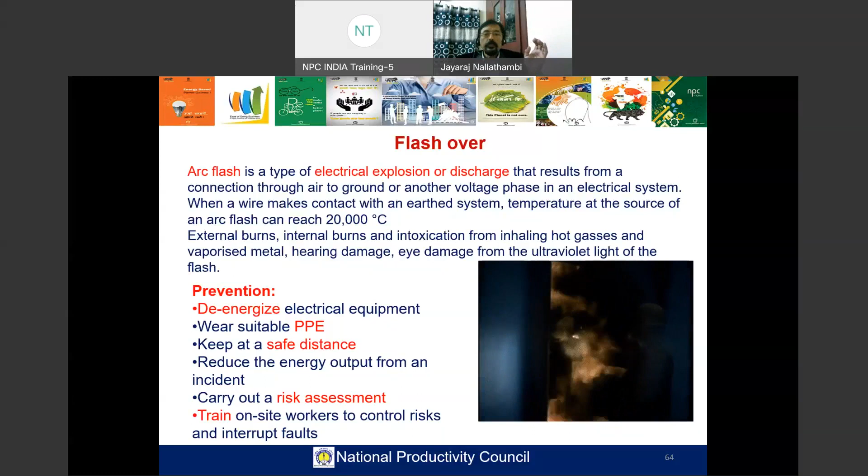The safety zone we already discussed, so I skipped that slide. Hazardous areas are classified as zone 0, 1, and 2. Zone 0 means explosive material is always present, zone 1 means occasionally present, and zone 2 means rarely present. Electrical equipment is designed according to these classifications.

For example, suppose it is zone 0 where hydrogen is handled. Hydrogen is a flammable gas with formula H2, and it is the lightest element among all elements. So it can enter into any area, even a small gap, hydrogen can diffuse into it. We already discussed the flammable range, the lower and upper flammable limits. For diesel, it is about 1.4% to 6.4%, whereas for hydrogen it is around 4% to 75%, so it is flammable across a much wider range. If hydrogen goes into a motor winding area, any heat produced, short circuit, or spark inside the motor may catch fire due to the presence of hydrogen.

So in this area, they continuously supply an air connection to the motor's inner casing, or nitrogen. Either of these is supplied continuously with a pressure monitoring system, so that the pressure is always slightly higher than atmospheric pressure. The hydrogen leaking out at atmospheric pressure cannot enter, because flow takes place from higher pressure to lower pressure, not the other way. So the motor body is maintained at slightly higher pressure than atmospheric, using either industrial compressed air or nitrogen. These precautionary measures are mandatory in zone 0 areas.

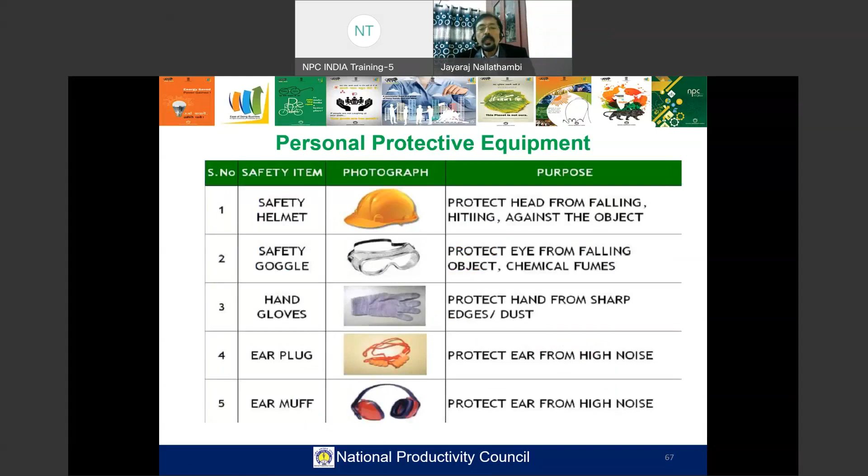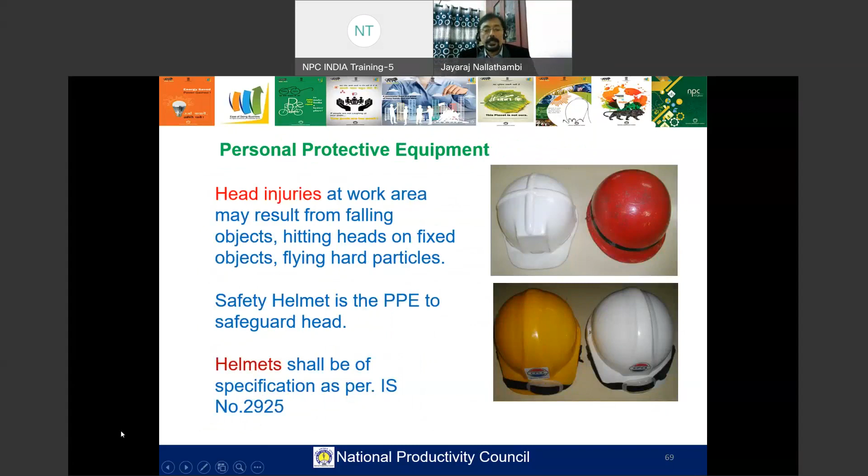These are the list of personal protective equipment, which we will see in detail. To prevent head injuries, a helmet should be used, a hard hat helmet, which can save you from head injury. The helmet shall be of the specification as per IS standard number 2925, which is very important.

Face shield gives total protection to eyes, nose, scalp, chin, etc. The acrylic blue face shields are used for viewing the burner. If the face shield is blue in color, normally used in industrial heater or furnace to see the pattern of the flame, we use that blue color shield.

Remember, eyes are rationed, only given once for your lifetime. So wherever it is applicable, use goggles or face shield. If it happens once and we lose it, that's all. It cannot be replaced.

Earplugs: the purpose of earplugs is that they can reduce the noise level by 15 decibels. That is very important. Whereas the ear muff can reduce the noise level by 30 decibels. So in a noisy area where some equipment is very noisy, always use either of these to reduce the noise to a certain level so that your ear will be saved.

Remember, the damage to hearing ability or the ear is permanent. You can observe that people coming from industry always try to keep the volume on their television or anything higher than the people in their family. That means they are always exposed to a higher noisy area. Whatever damage happens to them is permanent. Even if you come out of the noise area, it will not retrieve. So that is very important. So use these safety measures very regularly and properly.

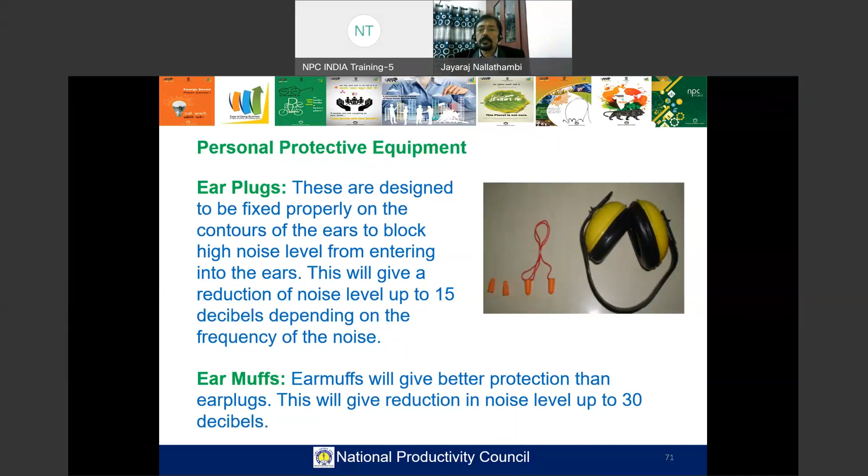Full body harness or safety belts must be used whenever we work at higher elevation. What is the definition of higher elevation? That is also very important. If we work above 2 meters level, it must be used. For any work above 2 meters, we should use it.

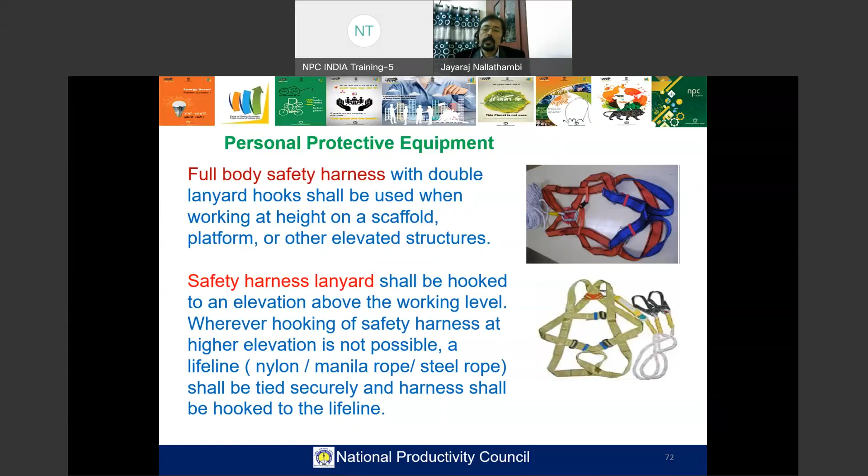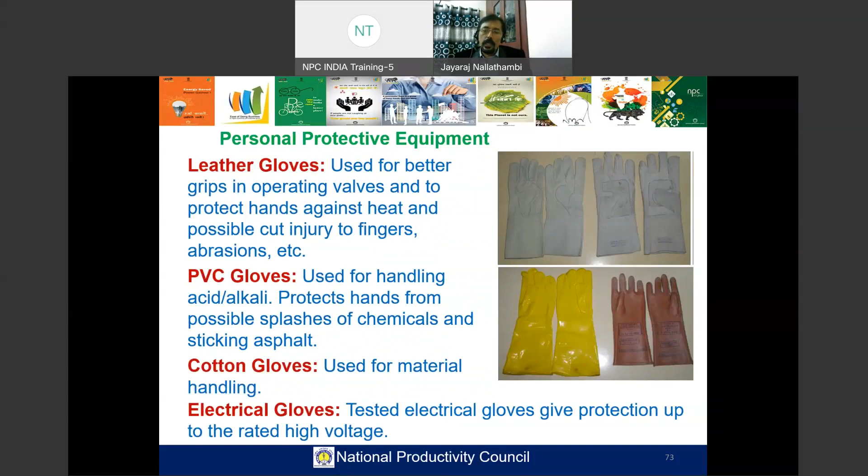Leather gloves, PVC gloves, cotton gloves, and electrical gloves are there. Appropriate gloves should be used according to the requirement of everyone's occupation.

SCBA - what is that SCBA? Normally it is pronounced as SCABA: Self-Contained Breathing Apparatus. The cylinder hanging on the back of the person contains compressed air, and at the bottom of this cylinder a regulator valve will be there which he can open. A pressure gauge will be there. That air will be supplied through here, and his face will be completely sealed so that outer atmosphere environment air or gas will not go to his nose. Only the air from the cylinder will go.

So using this, if any hazardous or poisonous gas spreads in a particular area, one can enter the area using this, and if required, rescue a person or isolate a leaky source using this one. But remember, one cannot use this for more than 30 minutes, because the pressure in the vessel is very high - 200 bars.

200 bars - how do you interpret that? For example, take our car tire. If you keep 25 psi pressure per square inch in a tire, that is slightly less than 2 bar. A car tire pressure is slightly less than 2 bar, while the cylinder contains 200 bar pressure of air. So you can extrapolate the intensity of the pressure here. That much pressurized air can be used for a duration of 30 to 45 minutes only, depending upon the size of the cylinder. That is very important.

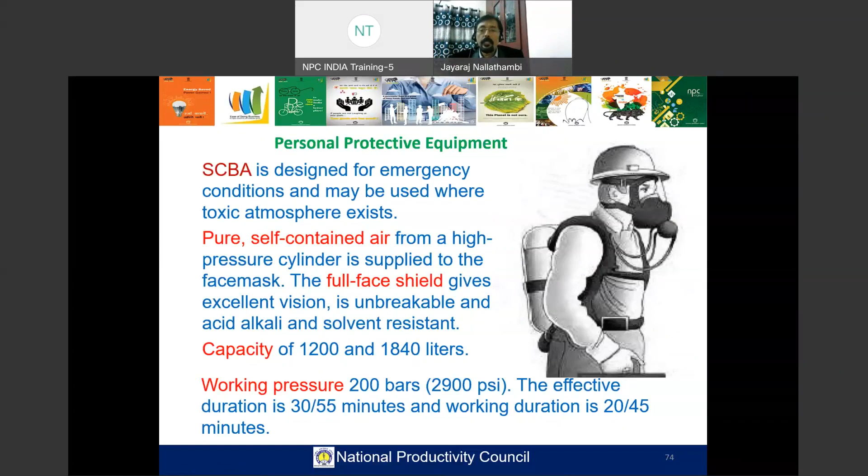Inspect all PPE prior to using each time. If any part of the PPE is damaged, seek repair or replacement. Store all PPE in a clean, dry and secure place. That is very important.

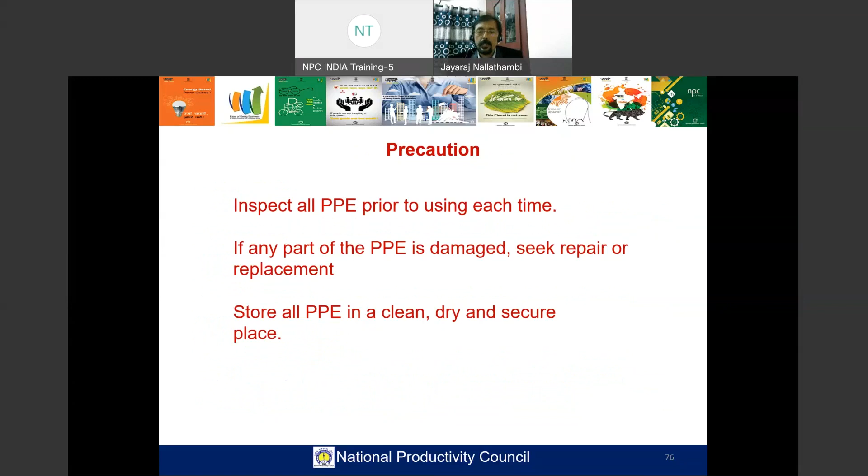You heard about MSDS, Material Safety Data Sheet. MSDS is nothing but, whatever chemicals normally used in any industry - acid, alkali, oil, or some solvents - this kind of different chemicals we use. The person handling that material should know the property of the material. Secondly, if any accidental contact on the skin, eyes, or mouth happens, what should be the first aid action one should take? That also the person who is going to use this must know. So all these things are given in a detailed manner in the Material Safety Data Sheet, that is MSDS.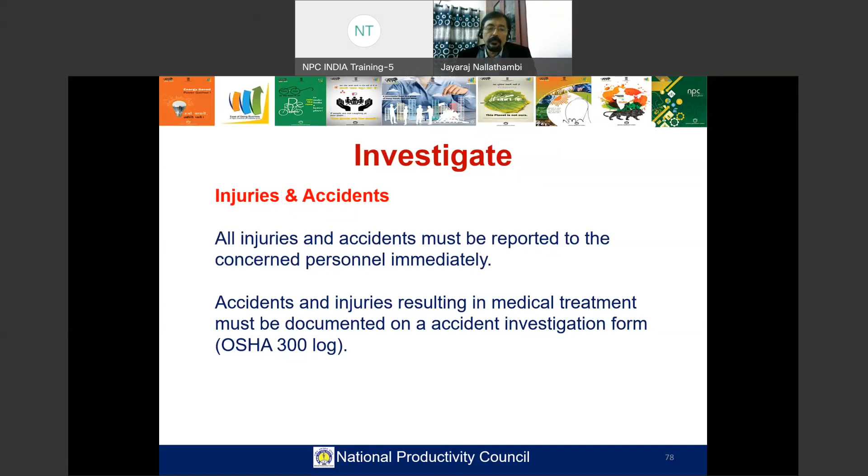That is very important. Accidents and injuries resulting in medical treatment must be documented on an accident investigation form as per OSHA standard. Okay, we will now see a case study.

Many of you would have heard of the Chhattisgarh incident in an aluminum manufacturing industry. I won't name the company. Of course, it is not controlled by them now; another private party has taken over. This is the Korba chimney collapse, many would have read about it in September 2009.

This chimney was constructed as a provision for letting out flue gas, contaminated gases, or products of combustion like carbon dioxide or ash. The plan was to construct a 275-meter height chimney.

It had reached a level of 240 meters. On that fateful day, lightning struck this chimney, and suddenly it collapsed and fell down.

What happened? Experts from the National Institute of Technology were called and pressed to analyze the incident. After analysis, NIT said it was substandard quality and technical fault in design. Substandard quality of material and a technical fault in the design itself was the cause for the collapse, they mentioned.

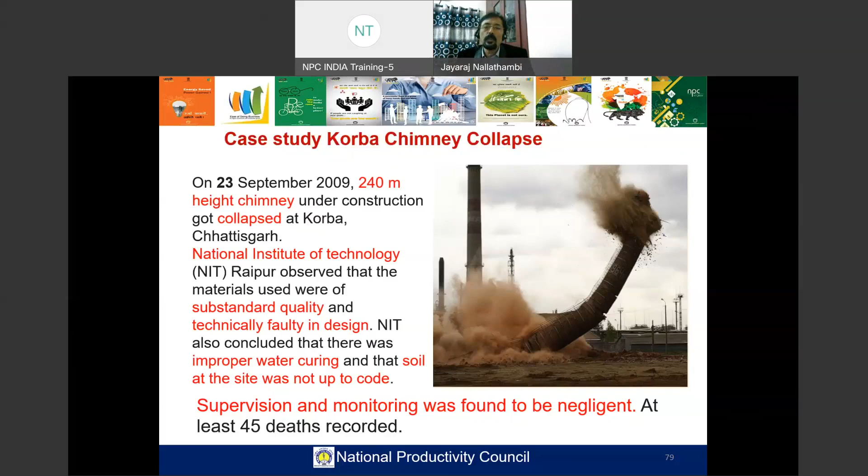This is case one. Another case history is the Jaipur fire terminal incident, in the same year, 2009. Petrol started to leak. It was reported that naphtha and petrol started leaking from a pipeline in a Jaipur oil terminal.

That oil started to leak and accumulated in the entire area within the bund wall, that is, in their periphery. Nothing could be done to stop the leak despite repeated attempts. This led to a large vapor cloud due to vaporization.

The flashpoint is minus 42.8, as we discussed for gasoline and petrol — that much a low flashpoint material. A lot of vapor was generated.

During that time, they started a diesel generator. The exhaust heat of the generator caused an ignition source for the vapor, and the entire area was in flame.

The fire was put off by starvation, meaning it was put off only after exhausting all the fuel. A large number of tanks got damaged in the incident. It was reported that the sound was heard up to 32 kilometers away from the site.

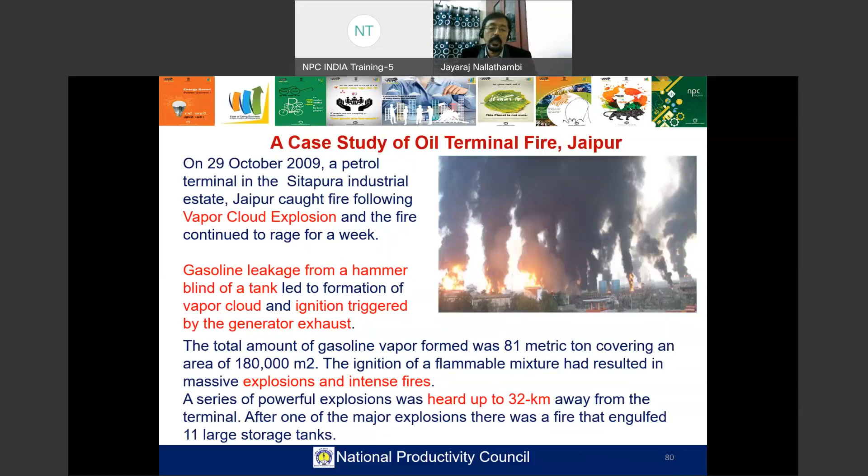So carelessness or disobedience to safety norms will end up causing a big loss.

Who moved my oxygen? Fire needs oxygen, as you must know, and you must be aware of this whenever fighting a fire. The firefighting crew will always be focused on putting out the fire at the front, but when it is in flame, it consumes the oxygen in the area. Normal oxygen level is 21% in the atmosphere. This term, oxygen concentration, has been frequently used since last February due to the corona situation.

Everyone is now aware of oxygen levels. So during a fire, if the atmospheric oxygen is fully consumed, the leftover oxygen available for firefighters to breathe is at a lesser concentration. That can cause giddiness and sometimes collapse due to lung problems.

So one person should always stand behind the firefighters to guide and advise them, and to rotate the person in the front line. One person should be rotated out after every 2 to 3 minutes. Standing in the front line for 5 minutes is very tough, so after 2 to 3 minutes, that person should be asked to come out and another person should go to the front. In this way, the rotation should continue.

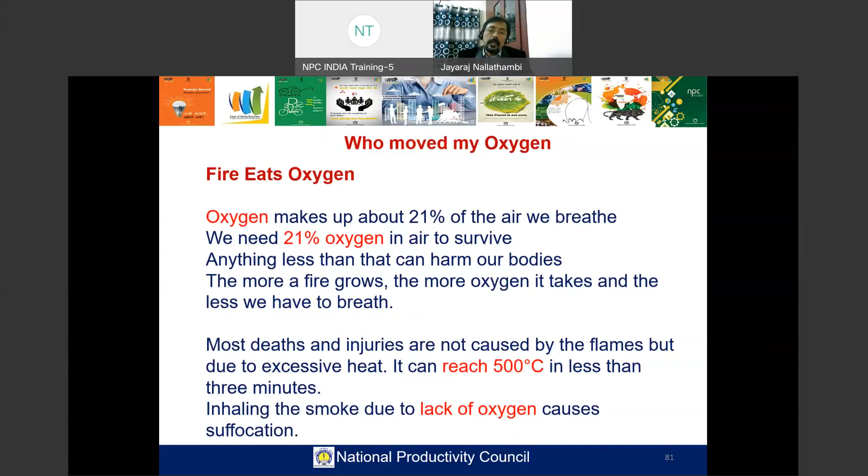That is very important because oxygen will be less in that area. Burn degrees - first, second, third degree as we used to call it. Redness of skin, least serious, is first degree. Red and blistered skin is second degree. Worst burn causes white or charred skin, that's third degree.

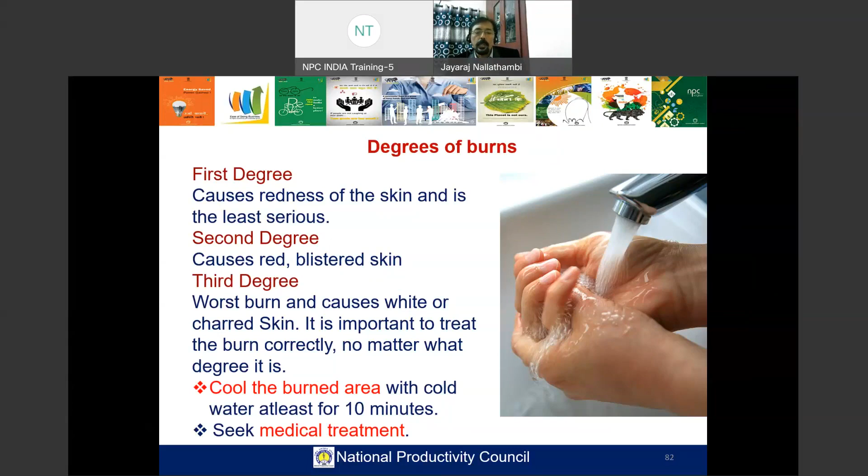It's important to treat burns correctly, whether second degree or third degree, whatever the level of the burn, apply lots of cold water on the burn injury area so that the heat will not penetrate to cook the flesh inside our body. Very important to cool that area with water. Cool the burn area with cold water for at least 10 minutes, then seek medical treatment.

Protocol - what is protocol? It describes the actions that must be taken to ensure employee safety in emergencies. It must be clearly written and everyone should be aware of this protocol. It should include floor plans and maps which show emergency escape routes, so people can follow the set procedure and automatically take their defined role in the emergency.

We already discussed all this. Standard operating procedure means every person's role - what step one should take, after which step this step should be taken. Everything will be described in detail.

Be well versed with the SOP of each equipment in the industry. Bypassing any steps of the SOP must be authorized by the appropriate authority. Depending on the situation, one should not indulge in bypassing standard operating procedure steps unless authorized.

Personal safety during firefighting operations. The fire crew stationed in a hazardous position should have an observer, as we already discussed. Wherever necessary, men should be protected from radiation heat by shields and water spray.

This is very important - the person approaching the fire seat in the front line will face very high radiation impact. To safeguard him from the radiation, a water screen can be created using the water hose, adjusting the nozzle to make the water spray like a screen. If we keep this screen in front of that person, the radiation impact on the frontline person will be less. That should be taken care of.

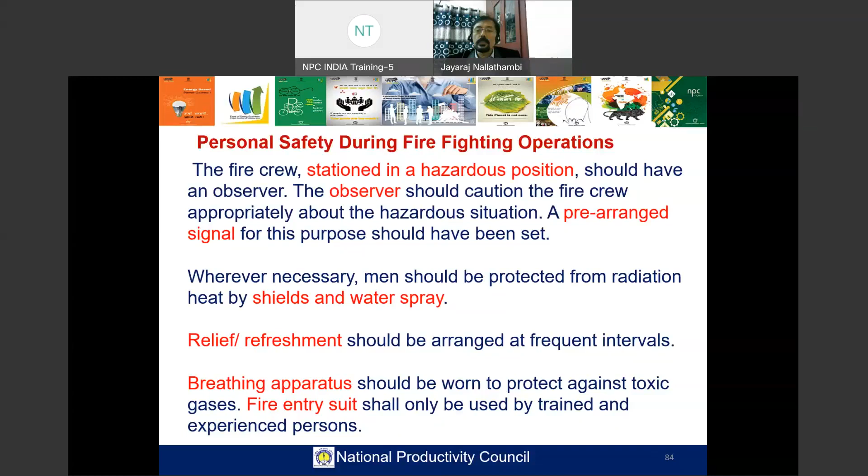Points to remember - the most important but most unacceptable point to many of us is that fire takes place due to carelessness and ignorance. That is a proven fact, though we are hesitant to accept it. Carelessness and ignorance is the cause of most fires.

You must know your fire call number, your industry or local area fire call number. Fire prevention rules should be followed. Report all fires. Don't tamper with firefighting equipment. Be sure you know how to use the firefighting equipment. Ensure that firefighting equipment installed in your section is prominently located and easily accessible.

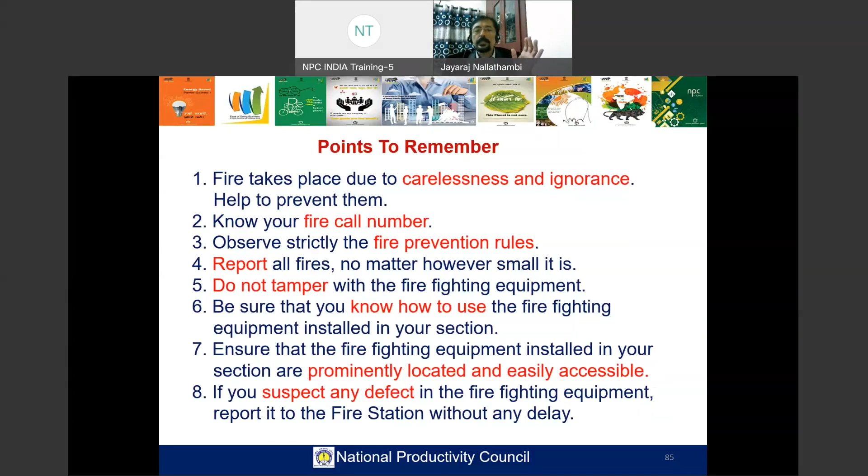If you suspect or detect a defect in the firefighting equipment, report it immediately. The used fire extinguisher should be replaced immediately. This is a very important point.

Sometimes in a process unit or industry, for a small fire, one of the employees would have used a fire extinguisher. If it comes to the notice of top management without an appropriate reason for its use, they may interpret it differently. So people think, let us not disclose it, we'll hide it - such tendency will normally come to people. But if a real emergency arises, it will not be useful.

So report every action and activity. If it is used, report it and replace it. Even if used inadvertently, it should not be held against the person by the management.

Suspend all hot jobs when the fire siren is raised. Use the fire hydrants properly - fire hydrants are meant to supply water for firefighting. Using that water for any other purpose is prohibited.

Don't park vehicles near the fire area except emergency vehicles. Another good practice - leave the ignition key of vehicles on the dashboard itself. Suppose a fire occurred and people are doing firefighting, some top management person comes in a car to inspect the area. He parks the car near that area, but he should leave the key in the car itself.

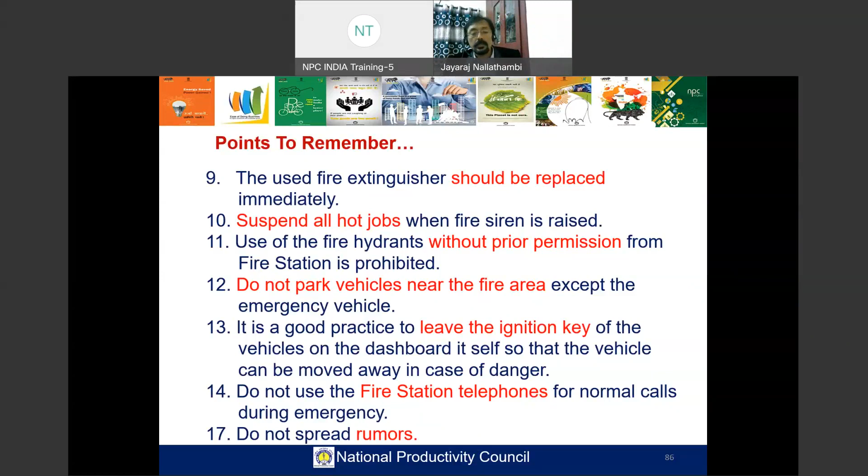Constitution of India provides detailed provision for the rights of the citizens, safety and health risks at workplaces, and to provide measures so as to ensure safe and healthy working conditions for every working man and woman in the nation. Constitution of India clearly specifies the role of government as well as the industrialists to ensure the safety of its employees.

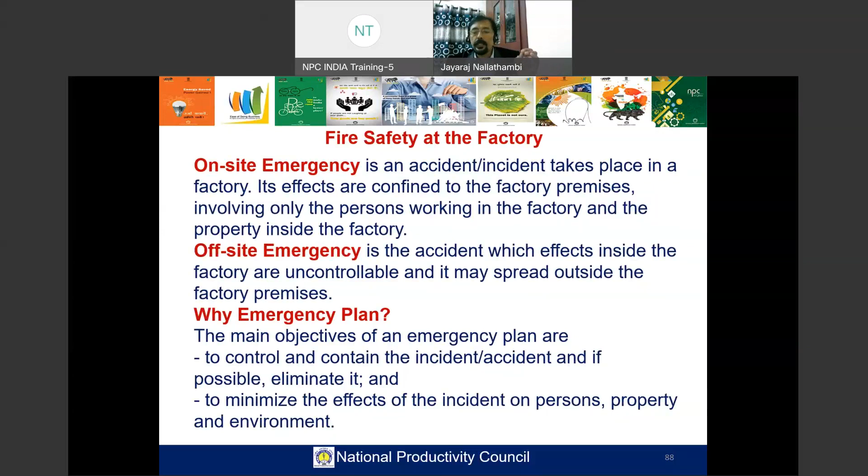Fire safety at factory, on-site emergency, off-site emergency, we have already discussed. That is mock drill. Why an emergency plan? The main objective of an emergency plan, to control and contain the incident and accident, and if possible eliminate it, to minimize the effects of the incident on persons, property and environment.

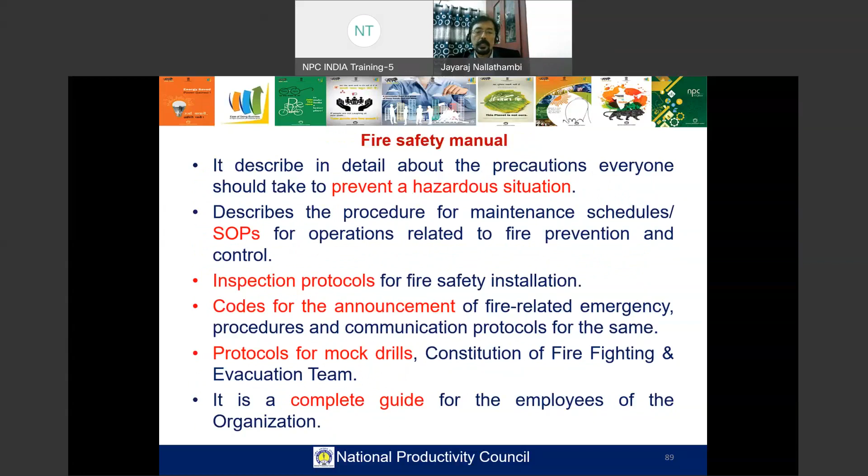Fire operating manual or fire safety manual should be available to the reach of each and every employee. Every employee should go through it and they should be familiarized with the procedure. The protocols, mock drill guidelines, all guidelines you must be knowing. And you all must know safety.

If you know safety, that is KNOW safety, there will be no pain. In other words, if there's no safety, NO safety, we will come to know pain, KNOW pain. So if you know safety, no pain. If no safety, we will come to pain.

Always remember, work safely, for the most important people in your life are waiting at your home, that is your family. We already discussed that firefighting is someone else's work, not our work - we should not think like that. Everyone should maintain safety. With one word, I will conclude.

We have a lot of ID cards like Aadhaar card, PAN card, ration card, driving license, master visa cards, many cards. At least if you take your wallet, more than the cash money, the plastic money will fill it more than that. All these cards are valid - how long are all these cards valid? Till the person is alive. As long as the person is alive, one should follow safety without any deviation, very strictly all the time. There is no holiday for following safety procedures.